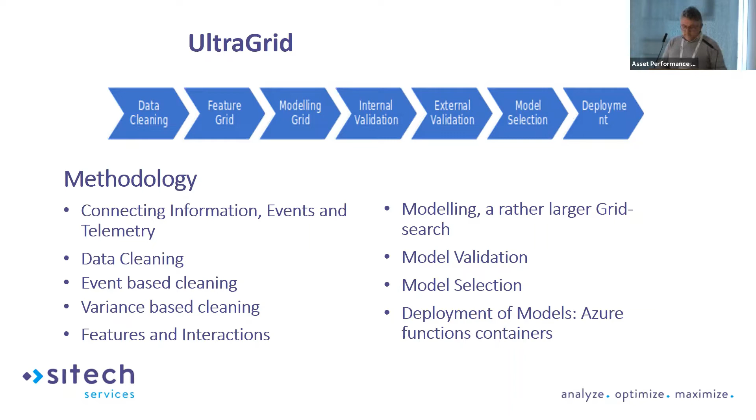Can you go one back? Yeah, thank you.

You have the temperature. This was a customer who had a motor failure several times on his plant. And he asked us, can you monitor it? And can you predict when it's going to fail? They're in the salt business. And we put some monitoring on the motor.

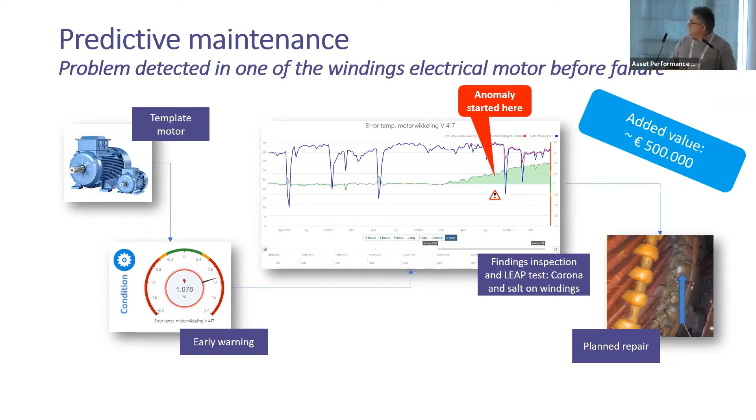But it's still the preventive and predictive maintenance thing. What we are more interested in, and what we also use in RBI, is the next step: prescriptive maintenance. We had a heat exchanger fouling, and the customer asked us, can you find a sweet spot? When do I have to clean this heat exchanger, before it's fouled too much and I have to reduce production? Can you predict when I have to clean it? Yeah, it's possible. We can, using the data you've got at the moment.

It was not in the scope to add additional measurements, because in heat exchangers the most interesting things are temperature in, temperature out, and flow. Then you know everything directly. This was not available for us. There was no measurement of temperature in, temperature out, no flow indication. They gave us a delta P, and they gave us the speed of the liquid. And with that, thanks to engineering, they also know which part you need and where. So what we did, we built a model of this.

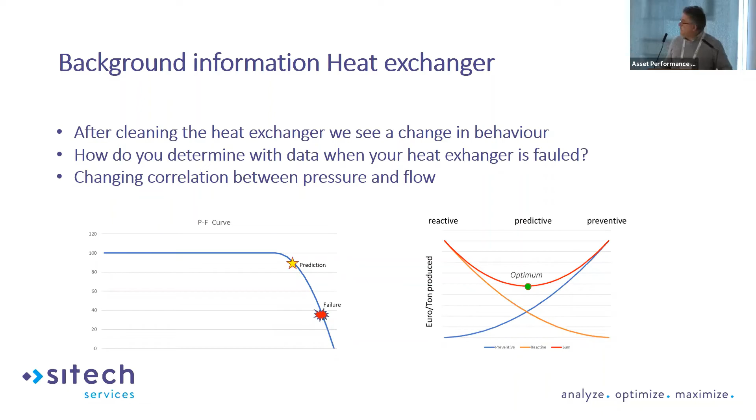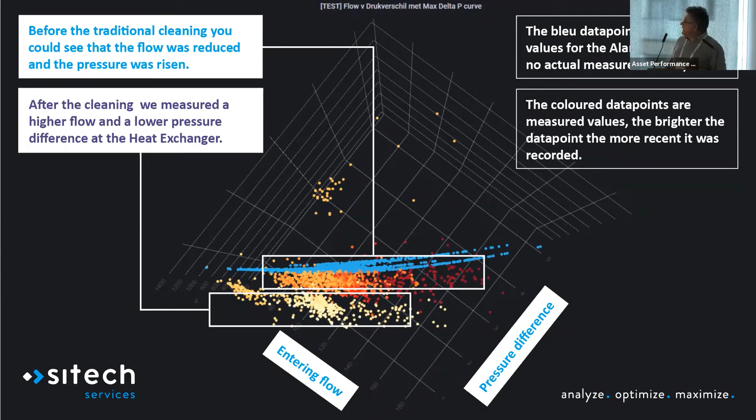While we were monitoring it, something weird happened. During a weekend, without cleaning, suddenly the heat exchanger was performing better than before the weekend. That's weird. The anomaly says this is not correct, wrong algorithm. Then we used the technology guys and the guys from Sitech. How can this happen? They said, there must be something wrong.

We collected the data, went over the data, and looked where the anomaly first triggered us. And at that time, we saw that an operator made a small mistake and overpressurized and overflowed the heat exchanger. You can see it in the little orange bump. It's more visible.

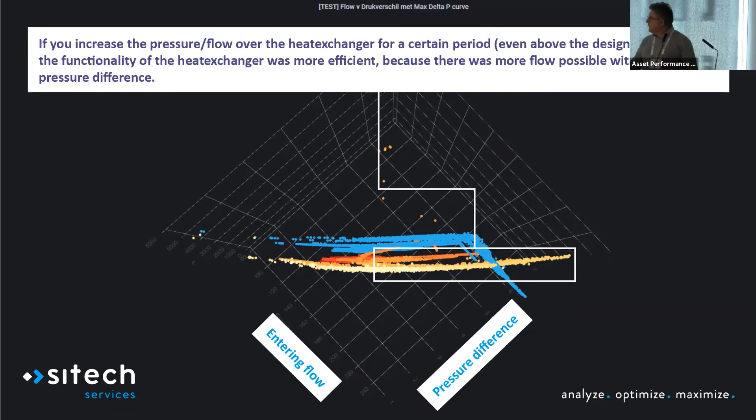You see it here. You see it in the orange bump, and after that orange, the later data is brighter, is more at the bottom. It means your heat exchanger is more efficient. That was interesting for us.

So we organized an experiment. We have a buffer tank available for that thing on site. We were lucky with that one, and we made sure that we could do this exercise again with a high pressure and high flow through the heat exchanger to get it cleaned again and to try if it works. So we did it again during a weekend, and what happened is in reality the heat exchangers performed much better afterwards.

So with the data we gather, we know when it's time to clean. Before, to clean it, it was taking it out of service, stopping the plant, opening the heat exchanger. Then with high pressure water, it will be cleaned. Water has to go to the water treatment area and all those things and problems. So you have a lot of downtime, a lot of cleaning cost, you have the safety issues and all with that. With this, we could do some inline cleaning.

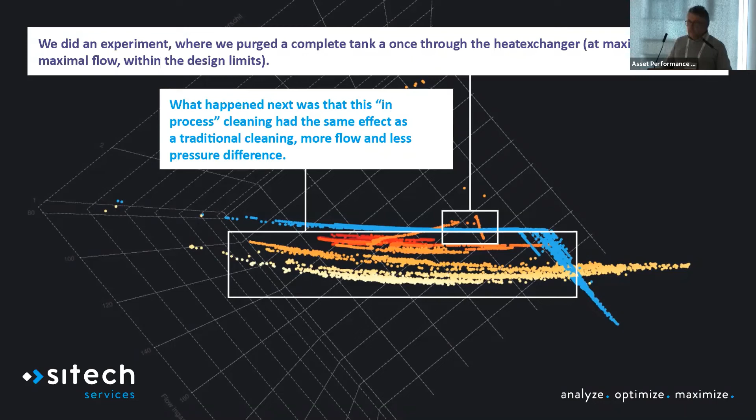That means no downtime for the plant anymore. The extra maintenance cost for cleaning the heat exchanger was scrapped from the budget. And we integrated this algorithm in the software. By using this, and that's interesting, is prescriptive maintenance. We now measure when the heat exchanger is a bad performer or is going to be a bad performer. With that knowledge, we can inline flush it, and you extend the use time of the heat exchanger.

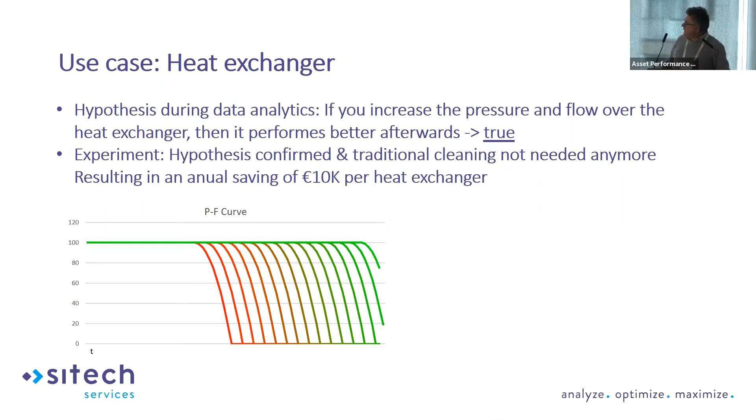So in the previous, we showed you the optimum between reactive and preventive maintenance, that the predictive is the optimum. What we've now seen is with prescriptive, when you can prescribe how to use your equipment, you can even lower your cost per ton produced.

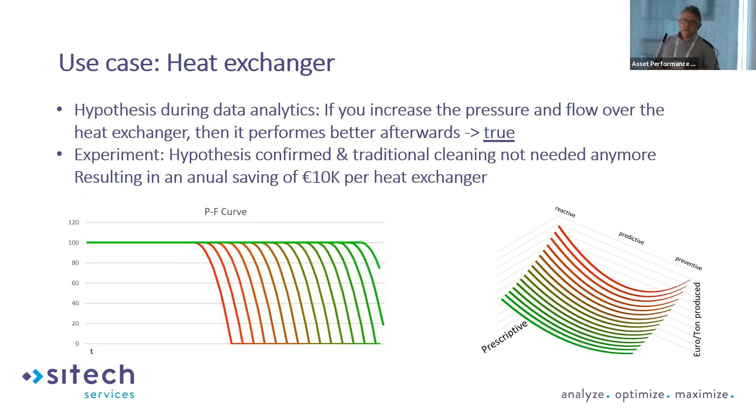This learning on where the sweet spot is in your factory, we not only use for heat exchangers, we use it for RBI also. In the RBI studies, you have the operating window, your integrity window, where you have to be to have the maximum lifetime of your equipment. We now guide the operators in a funnel to maximize the lifetime, to minimize the cost of that plant. If the operator goes outside this funnel, an alarm is triggered, or intelligence says something went not according to what we wish. That goes back to a forum, we call it a PIO, a plant integrity overview, where the operators discuss this anomaly.